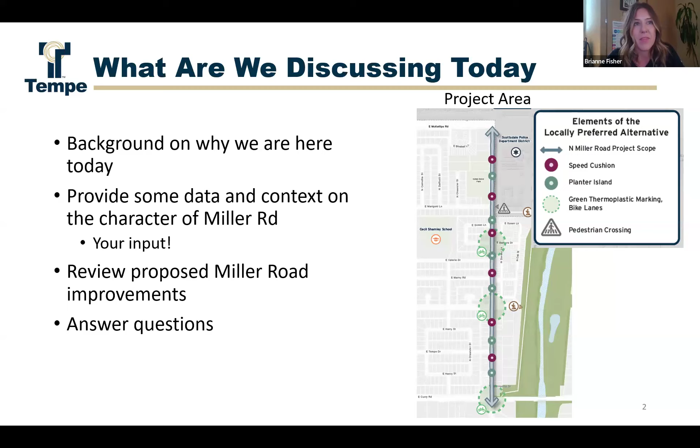The image you see is the project area of the infrastructure improvements. This will not be the last time you see that map. So just for some background, again, why Miller Road and why now? The city over the last year has seen an increase in residential complaints around safety on Miller Road, mostly as it relates to high speeds and high traffic volume. Miller Road is also scheduled to receive Pavement Quality Index work.

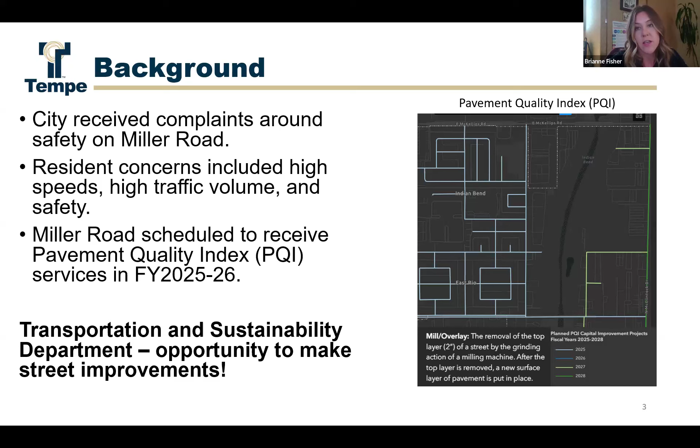If you're not familiar with the PQI program, voters of Tempe just passed a very large bond to improve many of the Tempe streets. What you see on the screen is a picture of planned PQI projects improving the pavement of your street. Miller Road, as you can see, is scheduled for 2025. And the Transportation and Sustainability Department thought, what a wonderful opportunity to piggyback off of the PQI work that is already scheduled, and while the road is already going through construction, make some additional improvements that can address those safety complaints and concerns that we've heard from our residents.

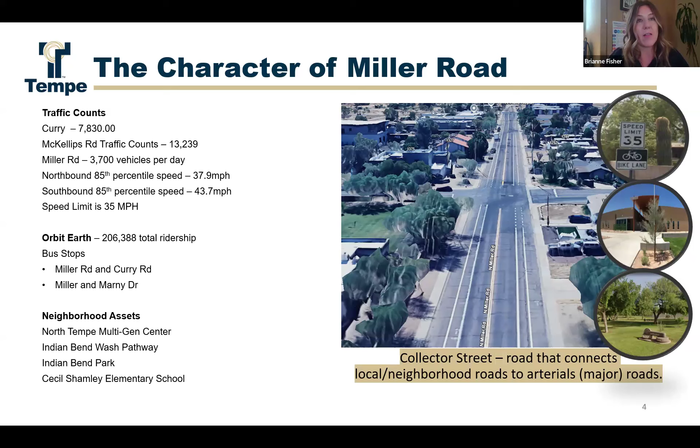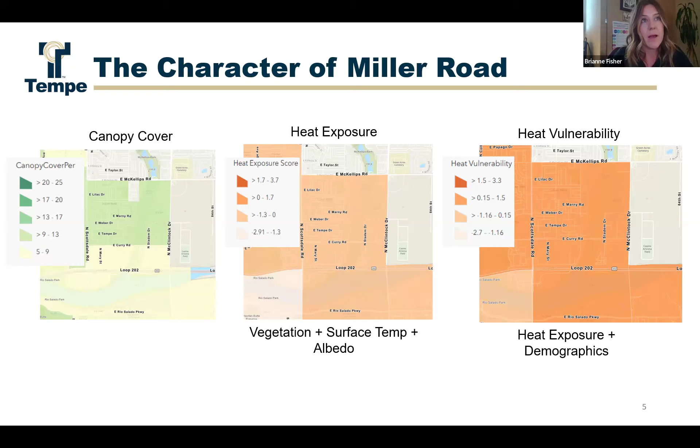And as you can see, again, from that heat exposure middle picture, the heat exposure is at that -1.3 to 0 kind of range. And then moving to the last image, heat vulnerability, that's looking at heat exposure plus demographic information. The 65 plus population in this neighborhood, income level, those living alone, the percent of folks in poverty ranges, those are some of the demographics that are more vulnerable to extreme heat and extreme temperatures. And so heat vulnerability in this area is relatively high. Not the highest in this city, but again, that 0.15 to 1.5 range.

So a little bit more information before we get into the proposed changes. Tempe's approach to keeping streets safe is Vision Zero. I'm sure some of you have heard of Vision Zero, a plan adopted by council a couple years ago. And really, for safe streets, it takes 3 different kinds of interventions. There's education, enforcement, and engineering.

While the city is doing a lot of education and enforcement, for instance, the city council will be putting forward some photo enforcement cameras at major intersections. This is an enforcement strategy. The one that's probably most relevant to folks in this area is going to be a location at Curry and Scottsdale Road. However, what we're really focused on today is those engineering strategies, those engineering infrastructure improvements that can change people's behaviors.

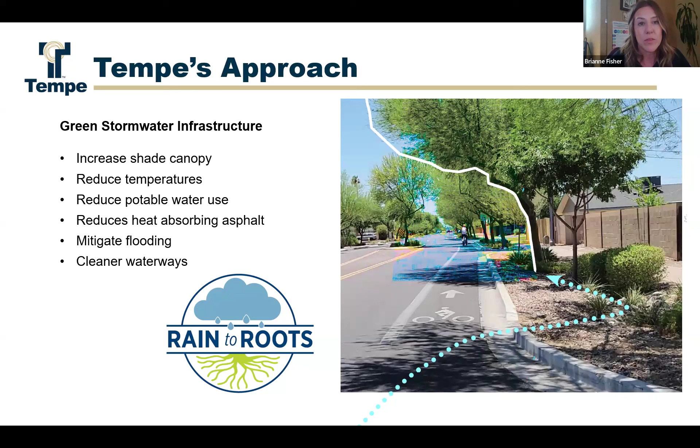You're using some of that asphalt space and creating a cooler environment, and you're also cleaning the water. Typically, when rainfall happens, the water is drained into storm drains, and it's taking all of those pollutants with it, and it goes into our waterways. So the more we can clean that up with natural systems, the better, and that's what green stormwater infrastructure does.

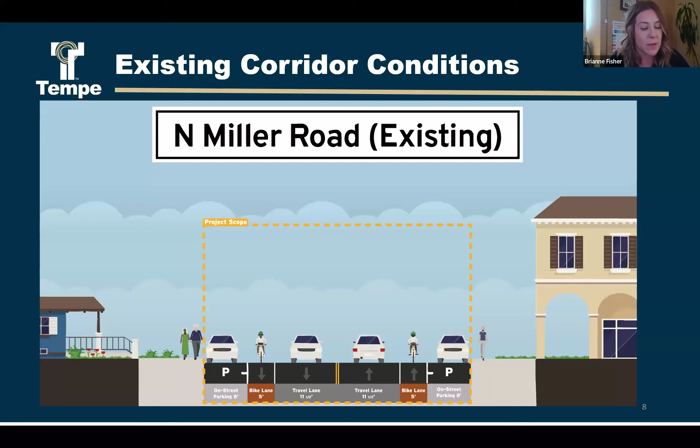So here's where we're getting into more of the nitty-gritty of the infrastructure changes. Here's the existing conditions. And just again, as a quick overview, there's 1 driver lane in each direction. There's 5-foot bike lanes on both sides. And then there's 8 feet of on-street parking. And there's a small area of residential permit parking on a stretch of Miller Road, kind of south of Tempe Drive. So that's the existing conditions.

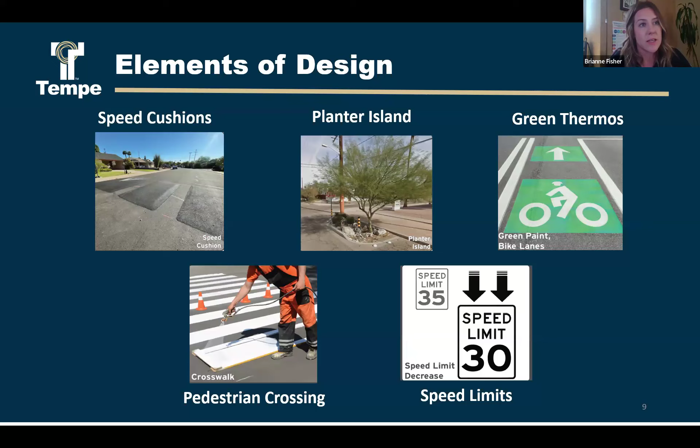Some of the changes that will be going forward are speed cushions, planter islands, some green thermo, so some green paint highlighting some bike lane. This will happen kind of near intersections, a pedestrian crossing, and then some speed reductions. And I'll talk a little bit more about these things in the next slide.

So these are the proposed improvements that we have. As you can see, the purple circles are indicating speed cushion locations, and the green circles are identifying planter islands. In total, there will be 6 speed cushions and 6 pairs of planter islands. Those planter islands are taking place on both sides, providing a little visual squeezing and narrowing of the street. On-street parking will be maintained the rest of the way through. The planter islands will be taking away, of course, the on-street parking option in those sections, but the rest of the area is maintained.

The green highlighted areas, there's no green thermo in the bike lanes currently, and so you have some of those areas proposed, and then a pedestrian crossing just south of Marigold that connects to the trail access path on Indian Bend Wash. And then as for the speed limits, traffic engineering is going to be proposing speed reductions, but that's going to be throughout the city of Tempe. Miller Road will be looked at, and these infrastructure changes, these engineering solutions, are really meant to make sure the character of the collector street is maintained, and the speed reductions are just complementary of those engineering solutions.

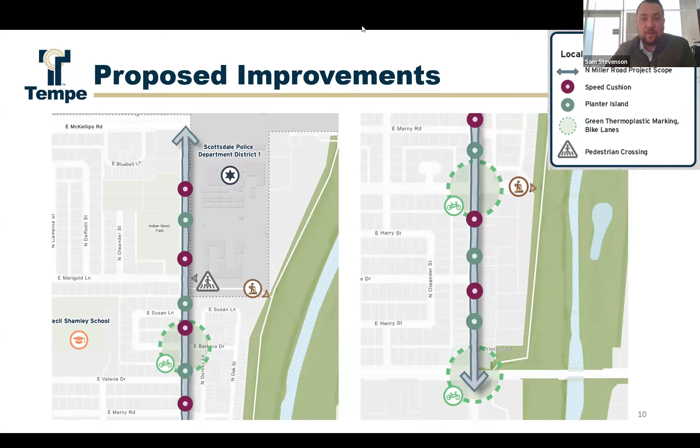Yes, I'm just going to jump in quickly, and I apologize, David. I don't know off the top of my head where these bus stops fall in our prioritization matrix for new shelter installations. I know there are 3 stops included in this project. There's one northbound right at Curry, and then 2, I believe, near Marny, that are actually on Miller and signed as bus stops. So I can look into where those fall on our prioritization list and get back to you. If not funded as part of this project, certainly, we have aspirations in the future to improve shade coverage at those bus stops, like we do at all of our unshaded bus stops.

Thank you, everyone. Thanks, David.

Okay, and then, yeah, whoever already asked for the plant list, yes, I can send them that directly. And like I said, we can post that as a link to download online. Okay, and so the only comment we had in the chat was that request for the plant list. Patricia said, thank you, a link will be great. So we'll get that on the project website, and that's just at tempe.gov/Miller Road. So we'll get that up shortly.

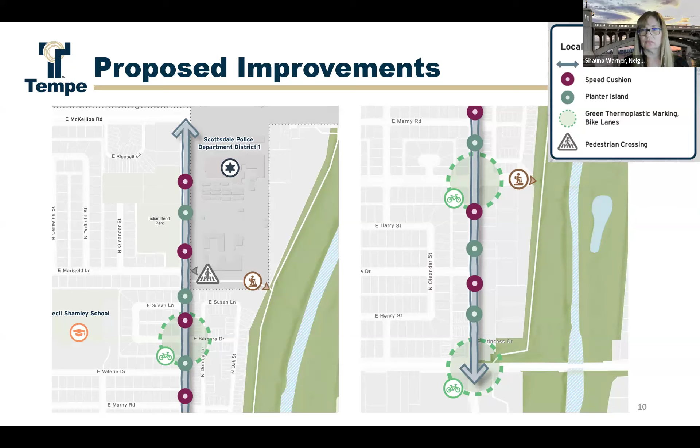Were there any other questions or comments? I'm not seeing any, Brianne. As we had mentioned, the survey is open through February 10th, so we encourage you to take it as well as your neighbors.

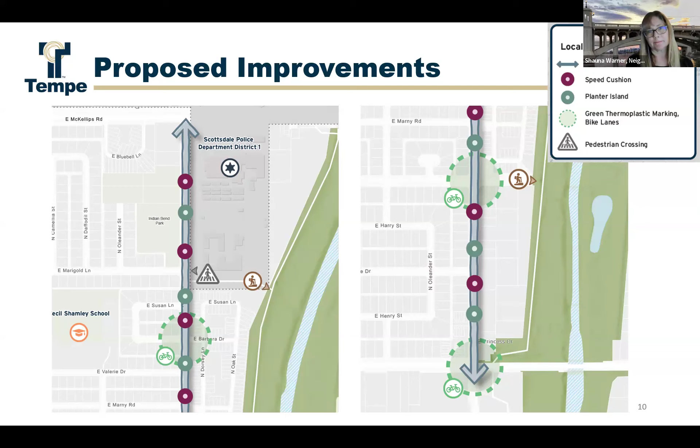Okay, here's one more. How much does the plant area reduce the bike lane? So not at all. It is just going to be removing some on-street parking opportunities, just in those pairs of 6 locations, the 12 locations, right? So you have your planter island, the bike lane maintains its size and its consistency all throughout Miller Road. The travel lane stays the same, and it's the same on both sides. No bike lane reduction or removal at all with the planter islands.